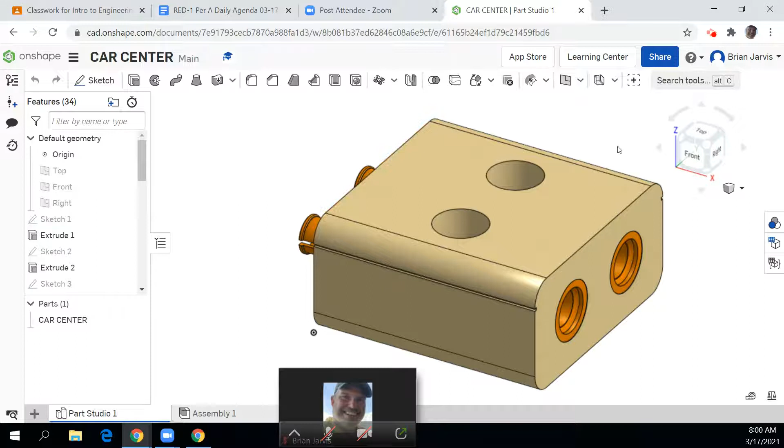Today we're going to show you how to draw the back or the rear of the car using OnShape. As we did for the front end, we're going to select the center part and we're going to modify this to be our back end. So how do we begin? Always start by going to copy, and I'm going to call it the back end.

Okay. Now, the back end has a few features here. I'm looking at it here. And the back end requires 2 pegs, but no sockets. So we're going to have to get rid of the top features and the sockets in the back. So we're going to come over here and just start looking at what we can get rid of, like those. Delete. Sketch number 2, delete.

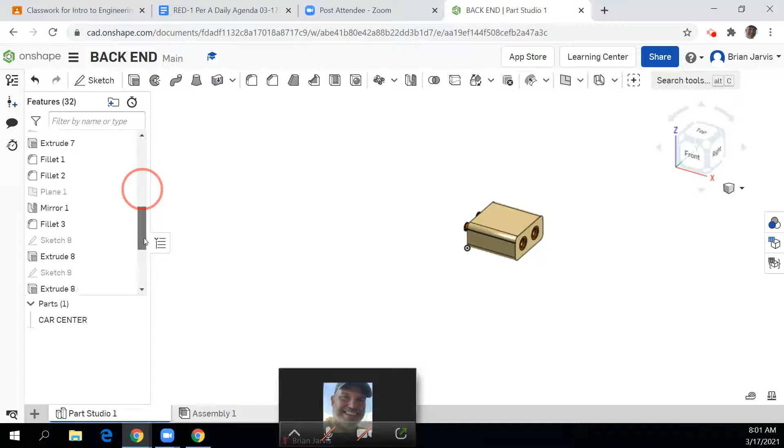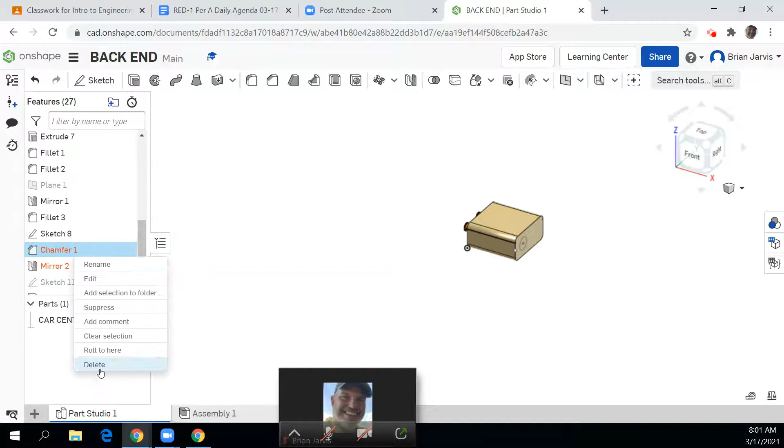Now, I don't want to get rid of anything that we did with the pegs, so I'm going to move back down and look at, there's our sockets. It does highlight them when you pick them out, so it shows you what they look like. Boom, all that's gone. Extrude, gone. Now, could I have gone through and just done all that? I could have selected it all really and done all that.

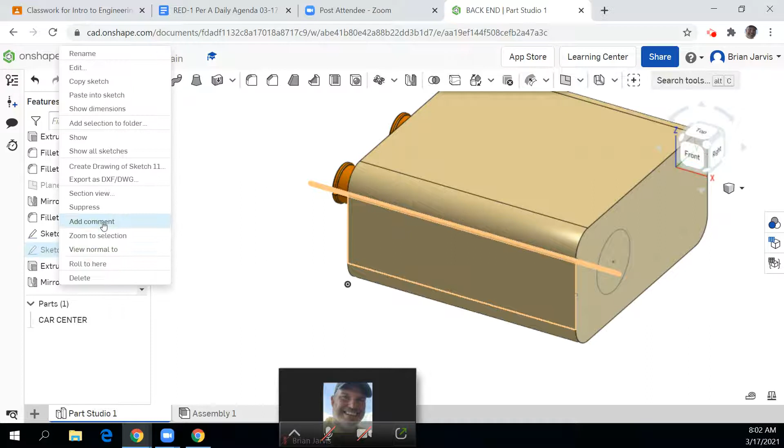Now I have, oh, that's on the side. I'm actually going to leave that. I think I can keep that. What am I talking about? That's this little groove right here. So now, as we did before, we're going to place a sketch on this right side. So I'm just deleting all the other sketches there. I got rid of them all.

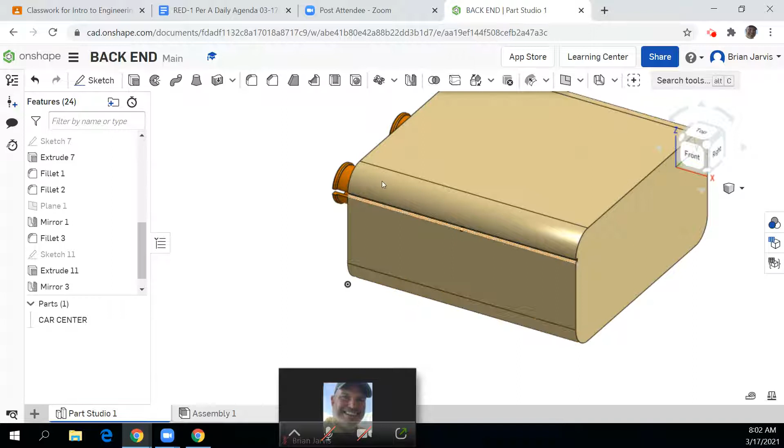Oh, look what it did. It got rid of the, let's go back and see what happened. See where I must have deleted a sketch that I needed. So I'm going to get deleted sketch number 8. There we go. So notice I can just hit undo and it goes back and gets rid of that for you. So now we're ready to go. I'm going to do a sketch on this edge just like we did with our front end.

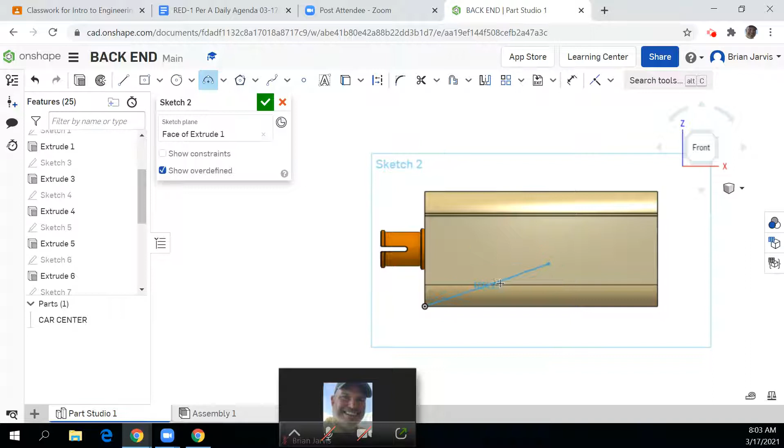And now I'm going to try to figure out how far do I have to come over. It says actually 1. So the back end comes flat across the top. And then there's a curve that comes down. It's probably a big curve. So I'm going to use my 3-point curve here. Starts about there. And probably comes up to about here. And then it has this kind of rounded bottom like that. I can add some dimensions after I get the shape outlined.

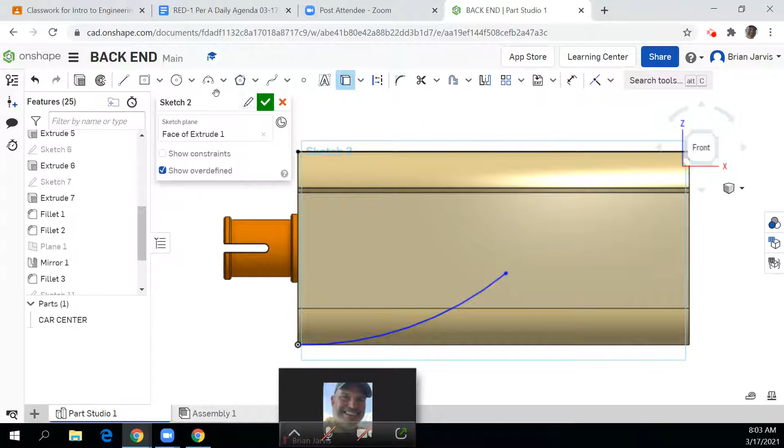And I'll do that. And then up top here, I'm going to do another. Now see how it's not touching? It won't grab that edge. This is where you could use convert or project. I pick that line. Notice it goes black. Because it goes black, I can use it for something. Whereas I couldn't do that before, right? So I'm looking at this and it comes down kind of like that. Maybe that's a little too low.

I do like using these arcs. They're not tremendously precise, but I think it looks pretty good when you do it. Oh, I got out of arc. Oh. Something. I think the back end actually goes up straight as I'm looking at it. Well, maybe not quite straight.

I haven't added a single dimension yet, so now I'm going to have to start looking at my dimension to see if it's going to be, wow, 1.09. I expected it to be 1 inch. So that edge, see, while it's still blue, I can still manipulate it. I have to get out of dimension, so I'm going to hit escape. I'm just going to drag this point down. It's not going to change the 1 inch. I'm just changing the angles and stuff to get it more like what I want it to look like.

And I do have a couple of dimensions that I'm going to go with. That one looks pretty good. I think this dimension really should be from here to this. Going to be right on that edge, so 0.16. A little lower, good. The other thing is I want to know where that transfers up. I think it's about 0.25 up.

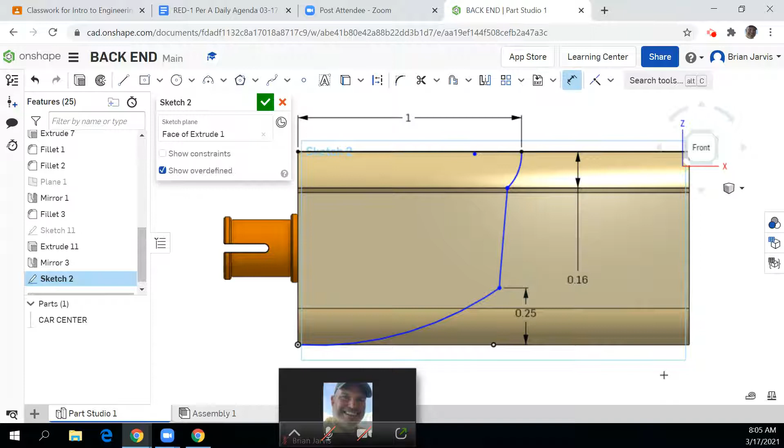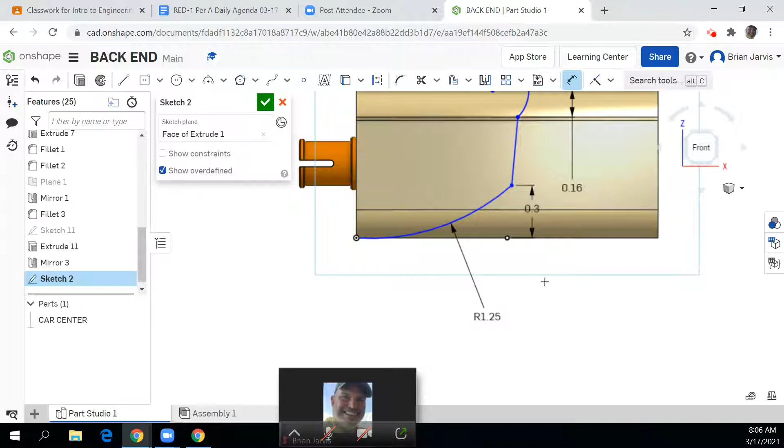Yeah, maybe I'm looking at some of the dimensions I have on here and realizing that's probably a little low. 0.3. Now, the dimension I had written down for this bottom arc was, let's see how close I came. 1.25 is what I had written down. That's actually not horrible. Be careful. See how this arc is not touching there? It may end up being a problem where it cuts out and then comes back into it.

So a lot of times I'll change this arc to be a little less. Oh, I'm sorry, a little more. 1.4. Cut it a little bit steeper. There we go. So let's just say it's not ideal, but we're going to go with it, and we'll play with the dimensioning later on.

Actually, I want to check one other dimension before I change it up. There it is. I want to see how far it is front to back. I have it written down as 0.9. So this is the last dimension I'm going to put on here before I start cutting this out. From there to there. I said it was 0.95. That wasn't horrible. I like the way this tapers in a little bit, although if I'm looking at it, it doesn't really taper in that much, but I'm going to leave that.

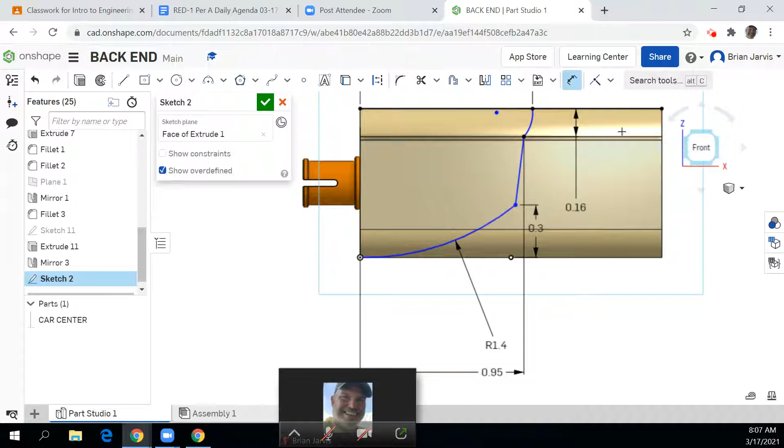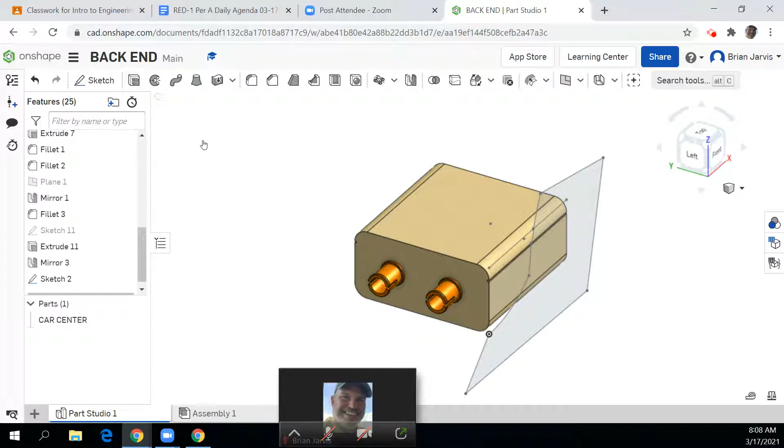So now, just like we did with the front end, we're going to make something that we can cut out of there. Make sure they touch all those points. And now I have a profile that I can use to remove the entire back end. So I'm going to do remove, pick my profile, and you'll notice it's going to cut right across the back and give me the shape of my back end.

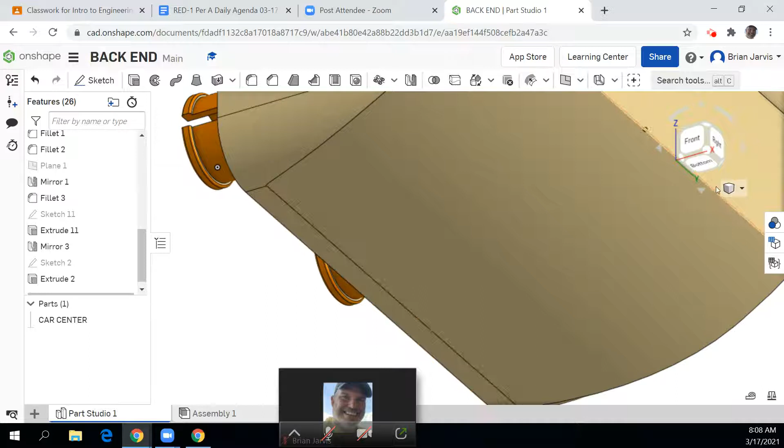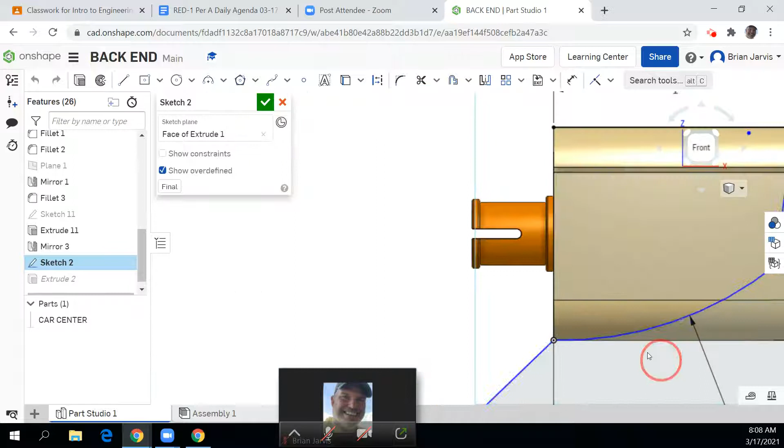There. That's what I was talking about. See how that comes out and then all of a sudden it stops? So that arc that I made, I can see my part and there shouldn't be a little stop right there. So I'm going to go back and manipulate my sketch just a little bit. Edit sketch. So that I don't end up with that little bit of a flat surface there. In order to do that, I'm going to have to increase this number, 1.5. Finish our sketch, and it should hopefully fix the problem. If not, it's going to get smaller.

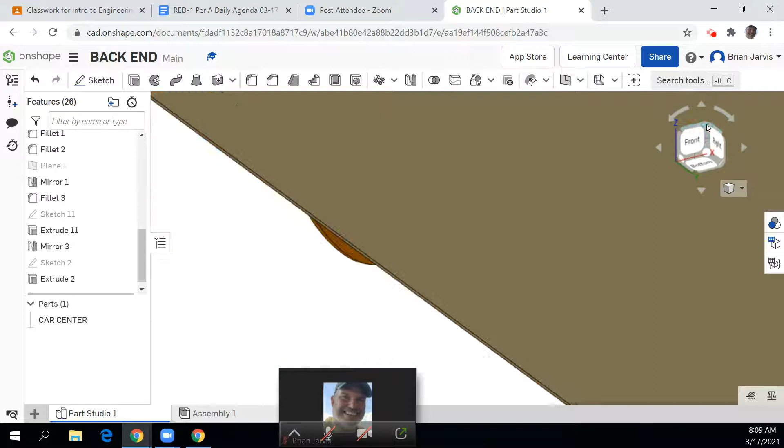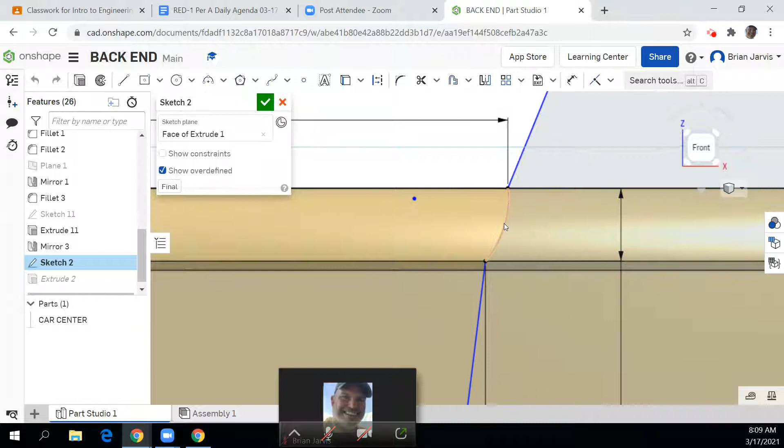Well, darn close, isn't it? Leaves that little tiny move. I guess that's more than fine. So now I'm looking at my sketch and the profile that I created versus the profile that I have here. Oh, I know what I did. I have to go back and do my sketch again. I'm just looking at it going, yeah, that doesn't look right. You know why? Because this arc right here is supposed to go in like this. So I had it go in the wrong direction.

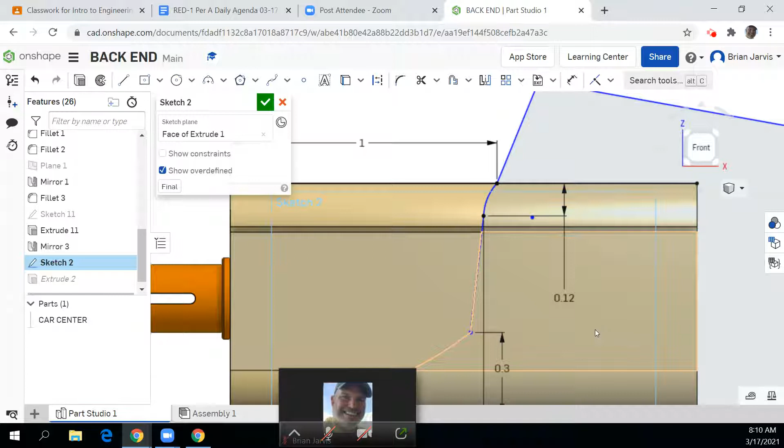And the other thing is, I don't think it's 0.16 down. I think it's actually going to be 0.12. So it's a little bit higher. Finish our sketch. That's better. I was looking at it going, ooh, that doesn't look quite right.

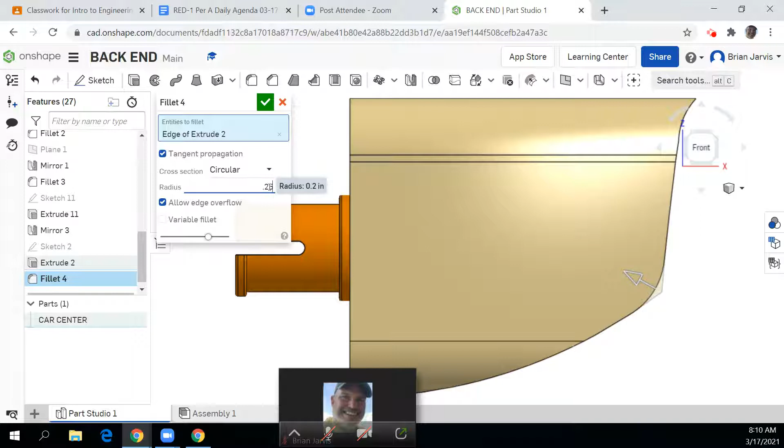The other thing I'm going to do is round this corner off here. It's not quite so sharp, so I'm just going to use a regular fillet to round that off. Boom. Actually, the 0.2 looks perfect. I have it written down as 0.25. I wonder if that looks better. Yeah, that looks good. So now I'm getting the shape that I'm looking for my car.

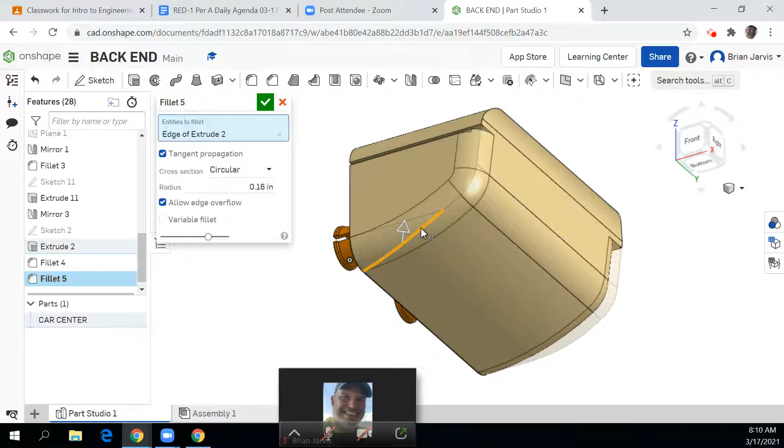And I can add the fillets now too, if you wanted to. Remember we did a 0.16 fillet on all the sides, so hopefully I can select this edge and see how it propagates that whole edge. I'm going to propagate this edge and that edge. And you know what? Look what's interfering here is this. See how this cuts through here? Same thing happened prior to this when we did the front end. So I guess I'm just going to have to go back and get rid of that.

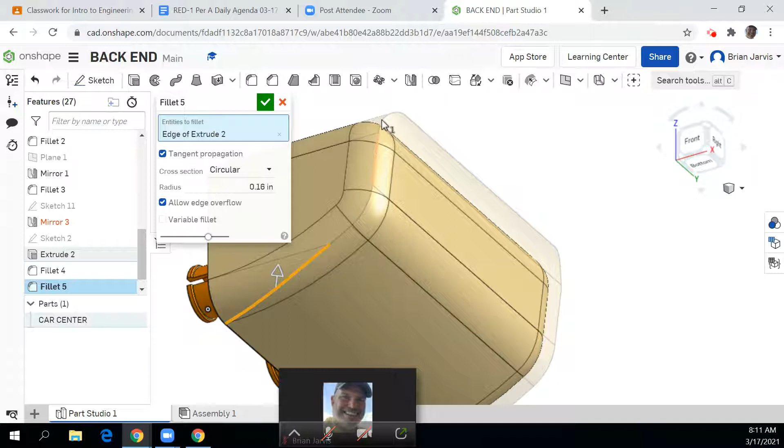Delete. Now technically I could leave my sketch there and just turn off the visibility so I don't see it. And that way later on if I wanted to put that groove back in, I can do that, which is kind of cool. All right, fillet 0.16. I should be able to just grab this edge, and see how it goes all the way up now. Yep. That's what I was looking for.

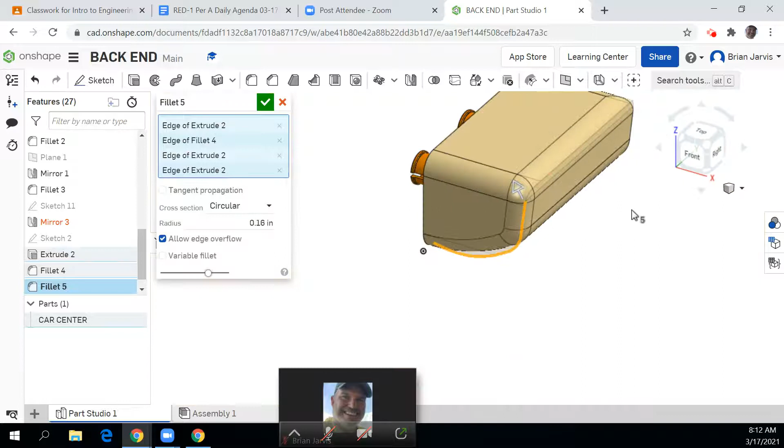Oh, see how that's funny. It propagated this top piece too, so I don't want that. There. So let's see. Take that edge. Make sure you get all the little edges there you want. That edge, but not this edge. Oop, not that. Sometimes I'll go back and select the different edges.

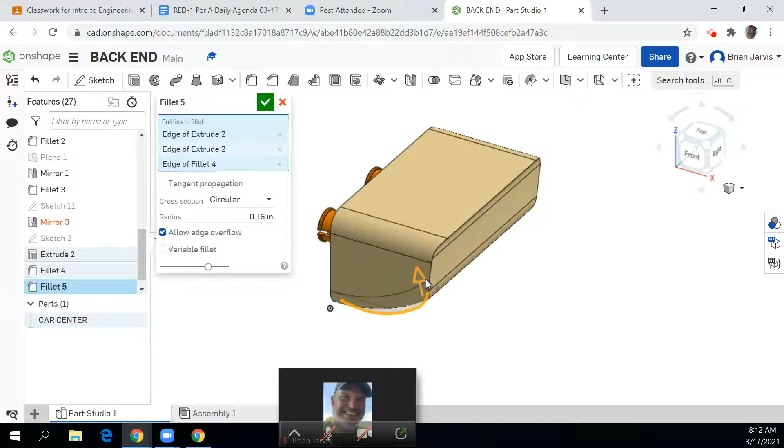Let's see. This edge for sure. I'd like to come up over this edge, but as soon as I click that edge, it rounds it right over. So a lot of times I'm playing with this, trying to get it set up the way I want it.

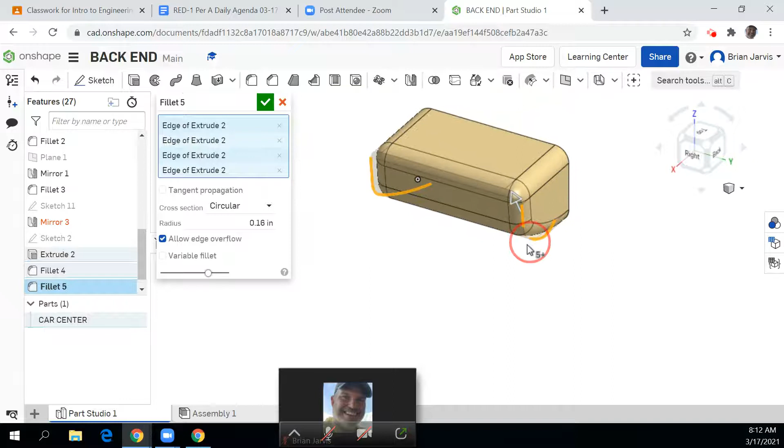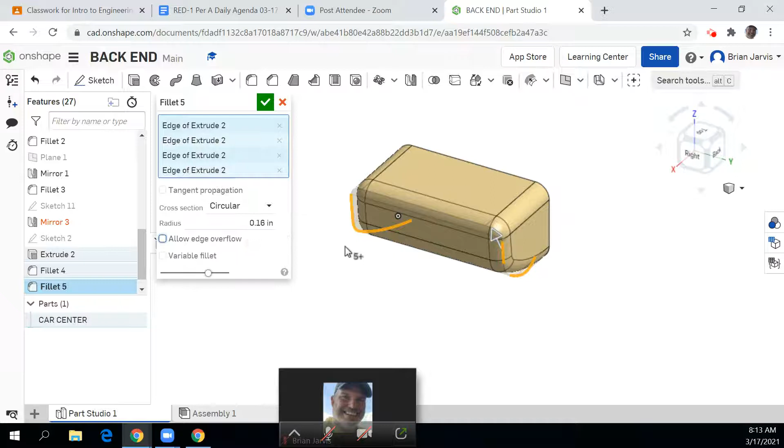So I wonder if that didn't change it. I'm just checking to see if they're all attached. Somehow it's propagated that other one. I want to get rid of that. Boom. Well, it's funny because I wanted to leave that back edge there, and it just wanted to go back and fillet it. See, that's what I'm looking for, that little piece right there. I didn't want to round that edge over.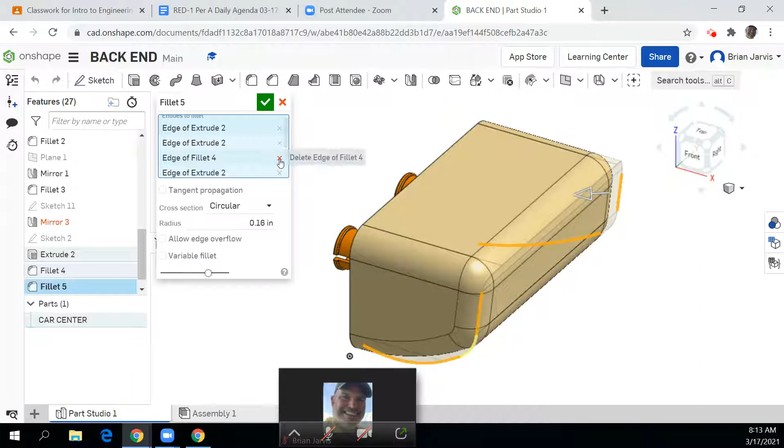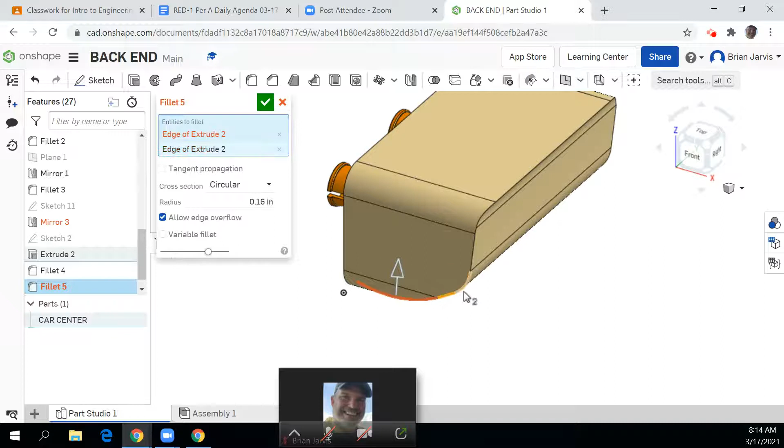So maybe I'll get rid of this little tiny surface right here. See all the edges that I picked? Pick this one. You know what? Sometimes it's easier to just delete it and then add it again. 0.16. I don't want to propagate the tangents because that was going to automatically cut the corners. Boom, boom, boom. That's where I'm going to stop, I think.

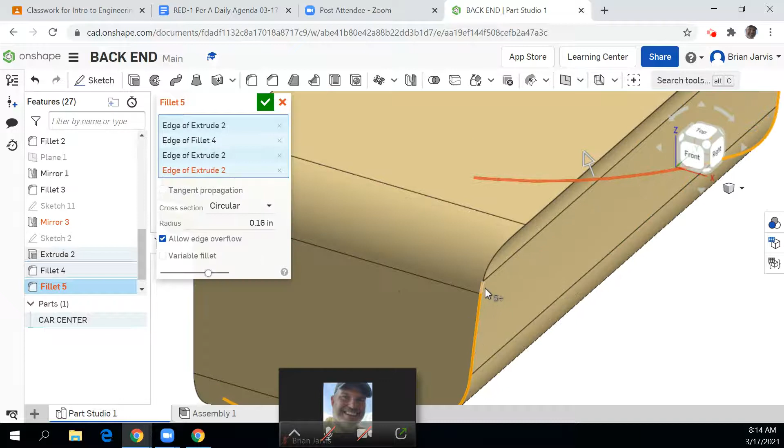I'll pick this and that, and this edge, and that edge. I don't want to pick this edge. Let's see what happens if we do that. Or maybe I do have to pick that edge. Oh, see, as soon as I pick that edge, clear selection. Oh. Well, it's one of those things. You'll get it. It's just a matter of time before it comes in.

Trying to get it just to the right spot. Even if I just did it to there, I'm happy with that, if it allows me to, and it didn't. It's funny. It's just this last one that it didn't like. So even if we just did it there, see how that looks. And then come over and do the same on this side. Fill it.

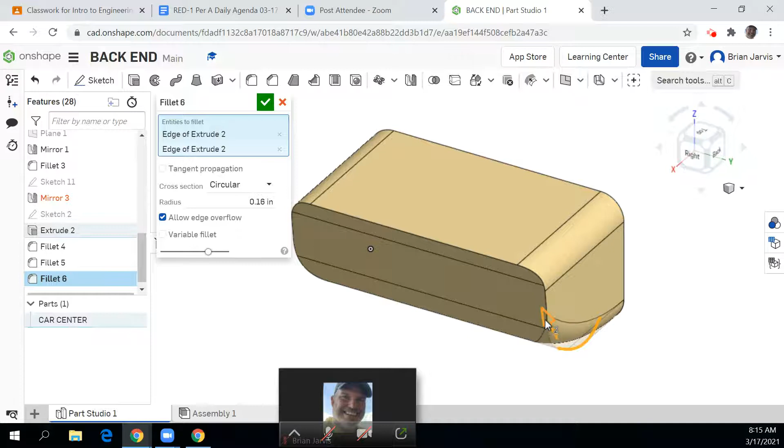0.16. Take this, that. Look at that. Because it says propagate. I don't want to do that. We'll be able to pick each one. Let's see if we pick that line. Doesn't like that.

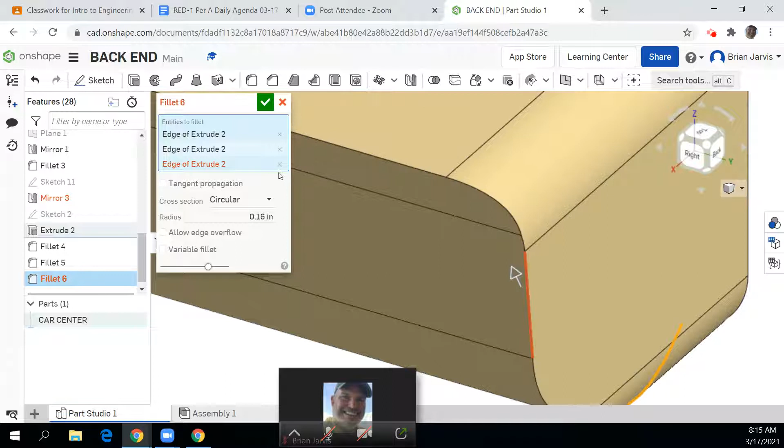Look at it, as soon as I pick that part, it comes right around that corner. And then it doesn't allow me to pick that part. So I'm just going to do what I can for now. You can always add them back later. I'm trying to get the right shape to that. That's not horrible. There.

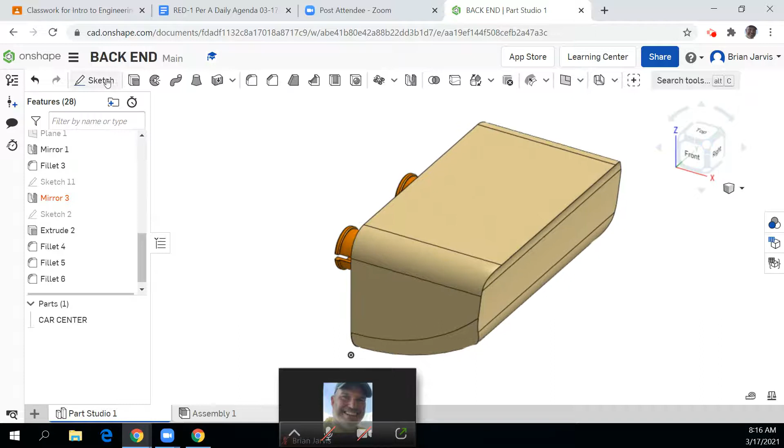So from here, I can do a bunch of different things. I have a couple of tail lights that I have to put in. I have to put the spoiler on the back, and I also have to put an axle on each side. If we went with an axle, I would just put a sketch on here, and the axle is just the same as we did the axles before. I should say the pegs. You start with a sketch. Remember, every single cylinder has 3 different dimensions. It says the outside dimension is 0.27, and then I have to know how far it is over.

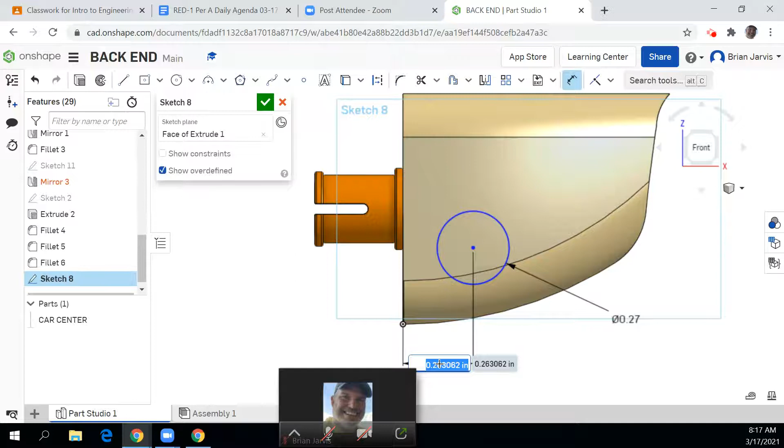According to that dimension, it's funny, I didn't put that dimension in there. I'm not sure why. I got the whole dimension there, I just didn't put the number in the value. So I'm looking at it, boom, 3.5. Whoa! I'm sure you've done that before. 0.35. And then probably the most important one is the bottom up. You want the wheels to be at the same height.

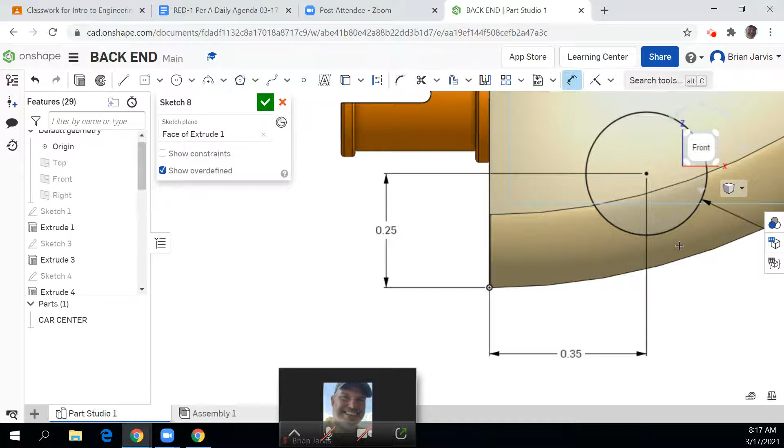So I'm going to pick, and see how it's coming, it's trying to do a parallel line, a tangent line. I believe you can right click, escape, dimension. Let's try that again. Dimension, pick, and pick. There we go. That's what I was looking for. And I have a height of 0.25. It's going to be right on the edge of the fillet, so that makes sense.

I'm going to finish that. I'm going to go to extrude, and much like when we did it before, of course, we're going to add 0.03. Comes out just a little bit. Oop. Isn't that funny?

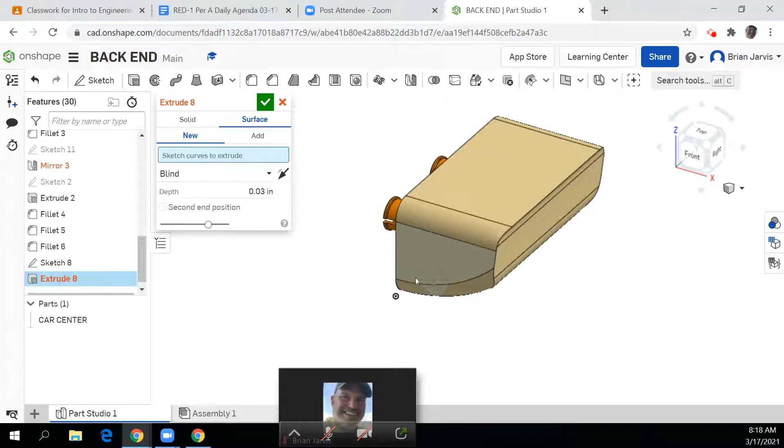Oh, I must have deselected the surface. Let me cancel that. I'll go back and do it again. I was moving too fast, I guess. Boom. Pick that. Pick that. 0.03. That's all we're looking for. Boom.

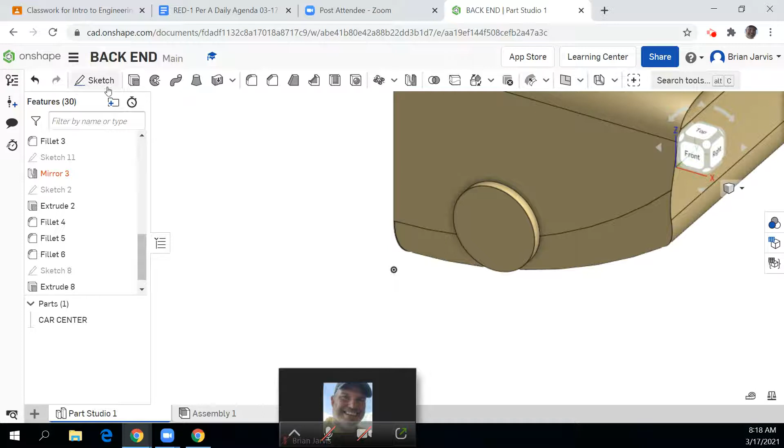Now, just like we did before, put a sketch on this. Put a circle. Make sure you pick the center. Should give you a little square there. And this is going to be the actual axle. This is the little piece up against there. And I have the axle written down as a dimension of 0.15.

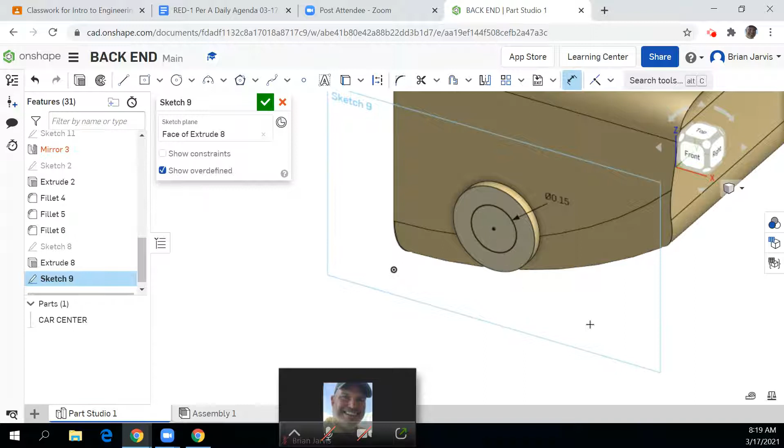So you got to remember, the wheel, right? The center of the wheel's got to be just a little bit bigger than the axle shaft. So you'd have to go back and look, because they're supposed to go together without interference, because this is a clearance fit. It's going to spin right around, right?

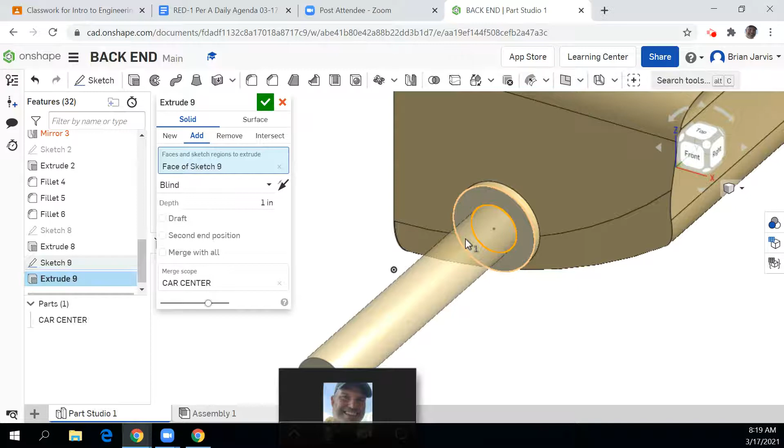So we'll go extrude. I'm going to pick that surface. This one comes out. I think I have it written down here. I thought I had it written down. Oh, there it is, right there. 0.3. That seems a little excessive. Didn't change it. 0.3.

Now we'll do another sketch on the end. Another circle. Same consistent centers, right? Dimension. And I have the outside one is 0.16. That can't be right. Oh yeah, maybe it is. 0.16. We said that was 0.15. I'm going to guess this is probably closer to 0.17. This will look better.

Note on my sketch, maybe even 0.18. Let's just take a look at that. Edit sketch. 0.18.

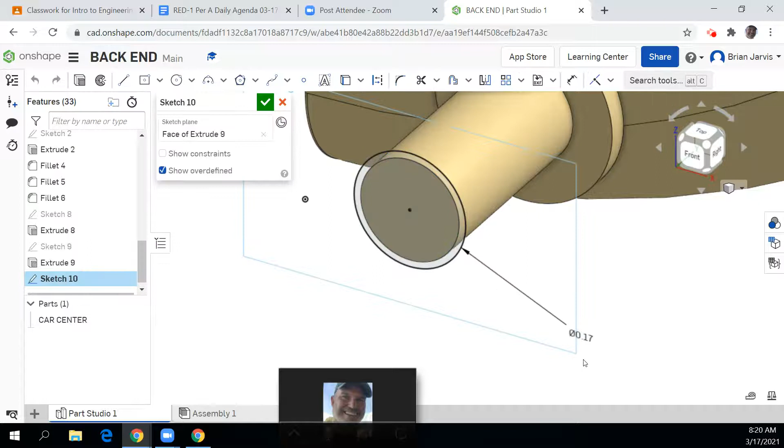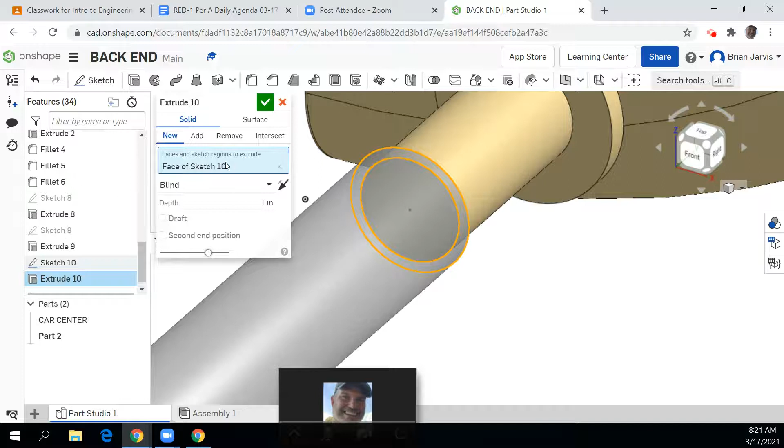Extrude. This time I'm going to extrude it back. Oh no, I'm going to extrude. Yeah, no, I'm going to extrude it back. This is actually pretty important. I did that 0.3, so that's going to be 0.3 is all the way out. So I am going to extrude it back. Add back point. Just a little piece off the back. There we go.

Once again, we're doing another sketch off the end and another circle from the center. This is actually going to be the cutout for the middle. And the inside dimension is pretty darn small. I measured it a few times and I actually wrote it down. I'm not sure I wrote it down on this sketch, but I'm just going to double check. That's what I assumed. It is darn small, 0.06. 0.06.

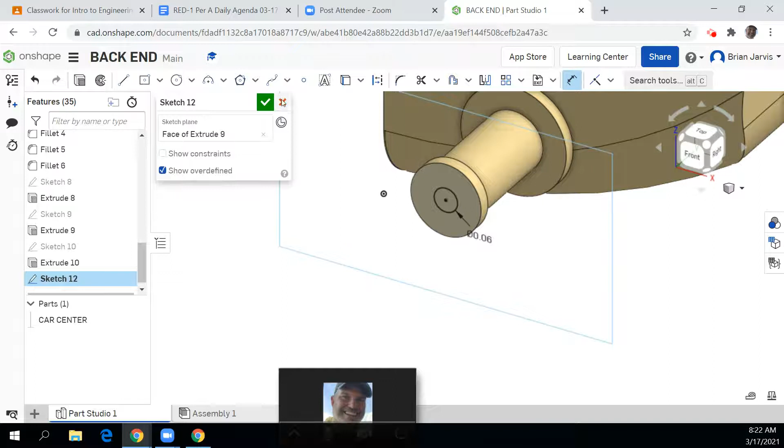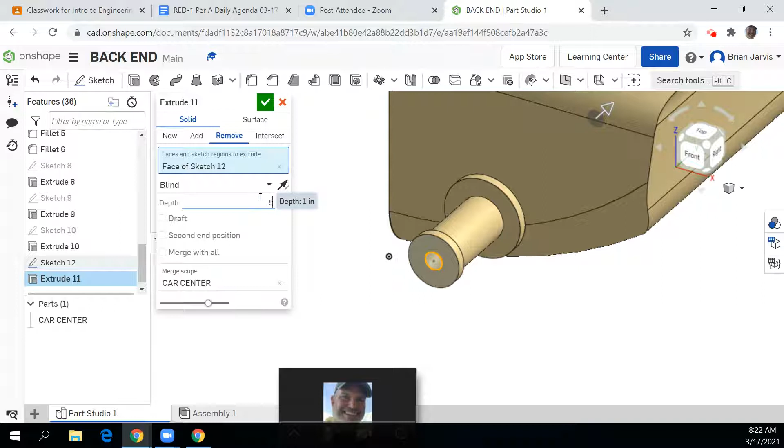Looks to me like that could be a little bit larger, but no, that actually looks pretty good. Just at a glance, sometimes it looks like it could be larger. This time we're going to cut it in, going remove, and we're going to remove at a distance of 0.5, just like we did the other ones. There's our peg starting to shape up right there.

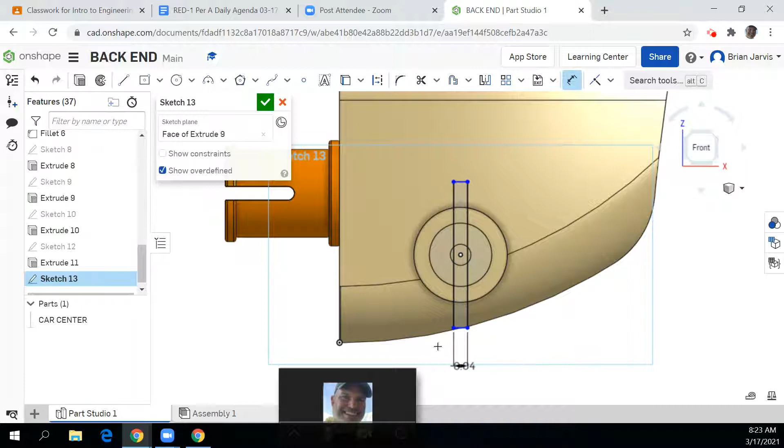So now I'm going to do another sketch off the end, because just like on the pegs on the front, there is a groove there. So instead of doing a circle this time, I'm going to do a center point rectangle. Boom. Just like that. It's actually the same size. If I pick that line, I can come right down and say 0.04. Sketch. Extrude. Remove. I don't need to pick the top and the bottom of that, but I could if I wanted to. Thank you.

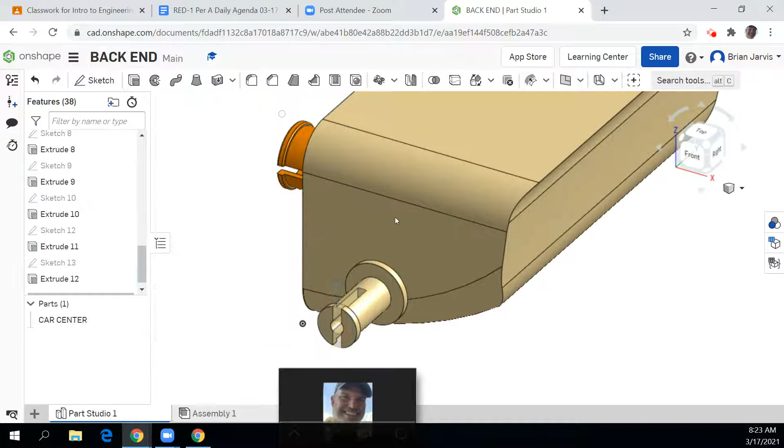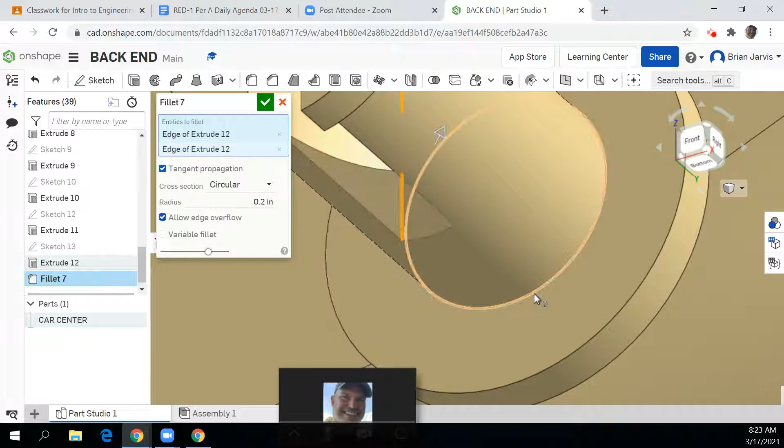Now, like I had done before, it's all about the tweak, making it look good. So I did some rounding of the corners here. So fillet, 0.02. That's rounded. And this edge is rounded. 0.02. That helps. That edge is rounded. And the other edge is rounded. There we go.

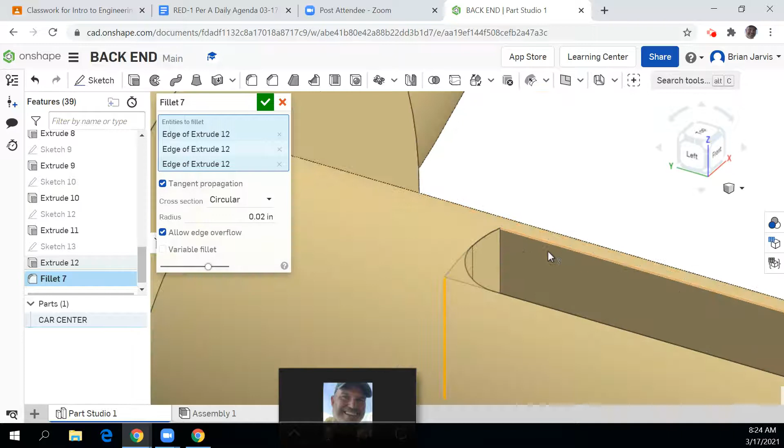And for looks, it's all about the looks, I guess. Let's see, it was 0.04. I have to go back and look. But we definitely rounded some of these edges here. 0.02. Let's do it. Just trying to remember what we used. I think it was 0.08 maybe. 0.08 of an inch. Yeah, just enough to give it a little edge. Make it look not so sharp. And there is our axle.

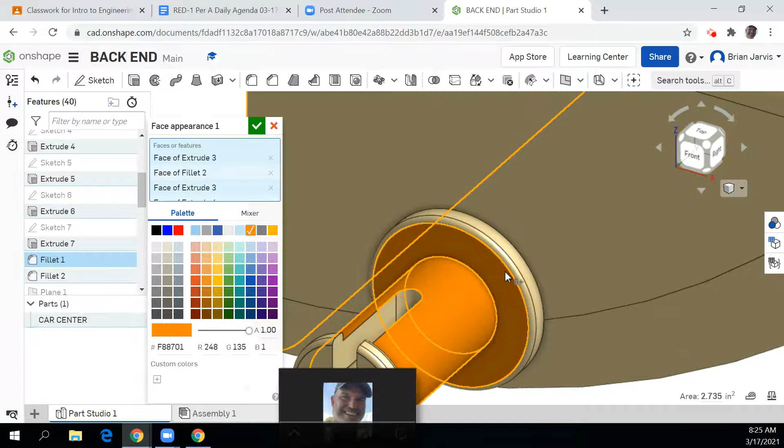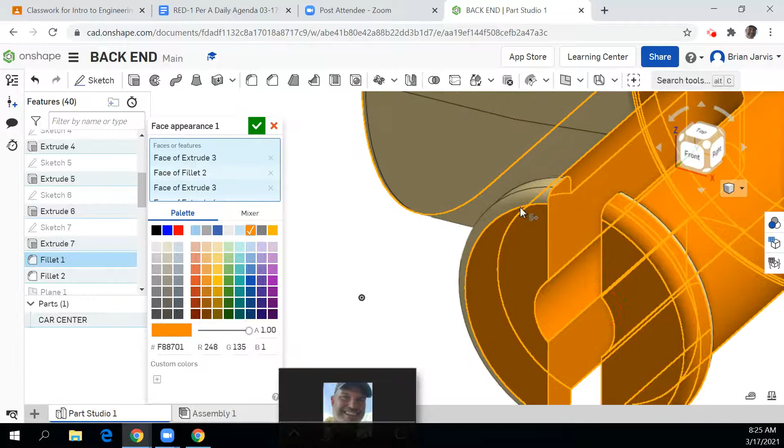So as we've done before, I like to do this. I just pick that. I go right click, edit face, and I can pick anything. See? I can pick all these pieces right here. And the nice thing is, I don't have to go back and select a color because it's going to do whatever color I had before picked. So I'm just going to pick all those surfaces. Oh, I missed it. I missed it. I usually get them all that I can right there, and then maybe I'll flip it around and look at it a little closer.

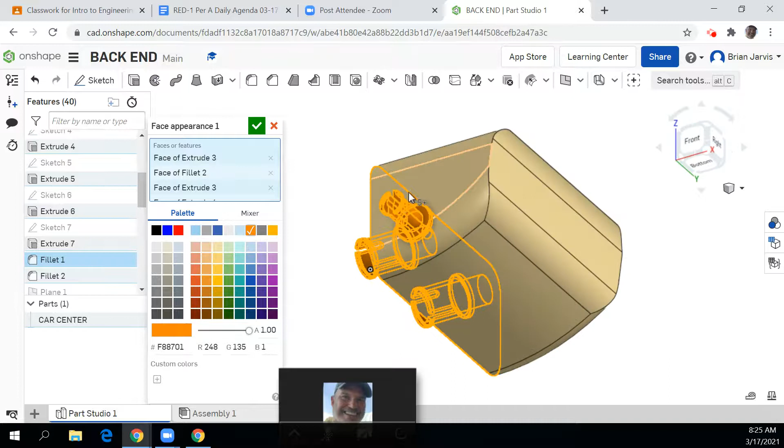Then I look at it from the, you got these surfaces that we didn't catch before. Good. Check. And then, I love this. We're going to put a plane on there. Actually, I think we have a plane there. Let's go back and look, because we had a plane way back when. There it is. See that? I'll just turn it on. Show plane. I can use it.

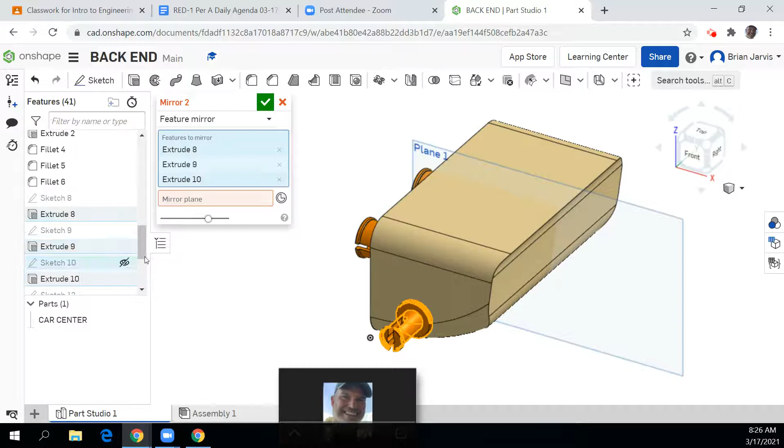So I go to mirror. And now I have to figure out what I need to mirror. So that. Oh. Oh, remember this? I hate that. Feature mirror. Now I gotta go back here. See where I started with our first. So that one, that one, that one, that one, that one, and that one. Our mirror plane. Boom. Check.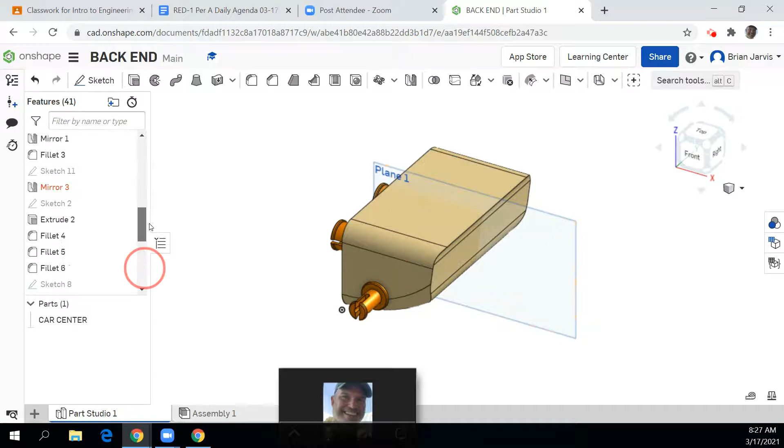We should have it on the other side. Oh, I didn't change the color, but I'll have to change the color. So now I'm going to turn around and I'm going to hide the plane because I don't need it anymore. So it's looking pretty good. I still got to do some tweaking. I know I have to put a couple of holes here in order to get that plane, so I can cut those holes out.

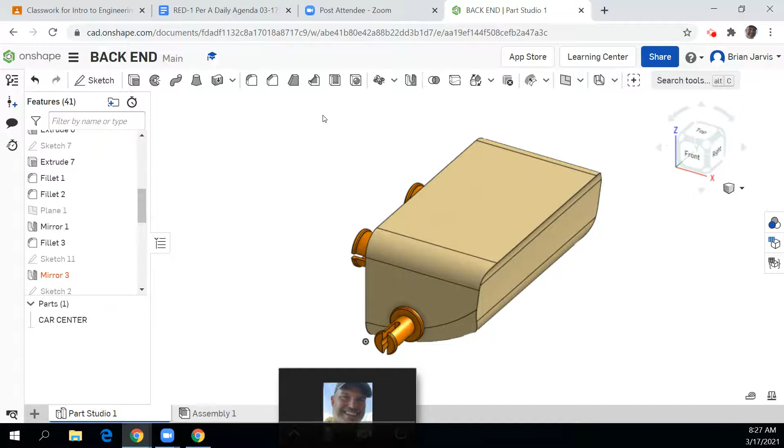I'd go to plane, and I'm just going to use a regular old offset to pick that. Notice it's going the wrong direction there. Go back the other way. 1 inch is good because that's what I said it was. Put a sketch on that plane, and I'm going to start cutting out my holes that are going to be my taillights. One here. This one has 4 of them on there. So I go 1, 2.

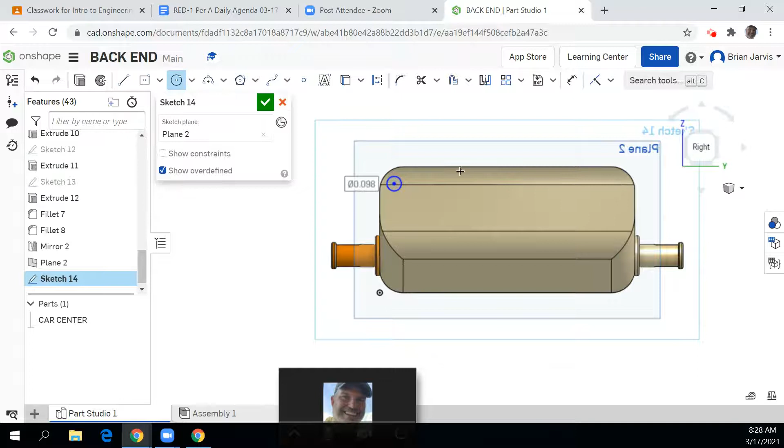Now I could use a mirror on this one too. Maybe I'll do that. So I got to do 2 headlights or 2 taillights here. There we go. From the top edge to the center. I have written down 0.12. That's pretty darn close, isn't it? Now to make them the same, I could dimension it, or I could just say horizontal, pick this one, and pick that one. And then they're going to be the same height.

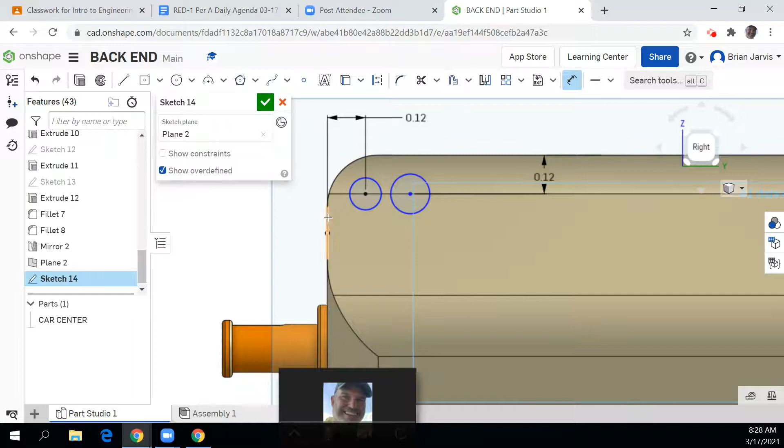From the outside edge over, so I'm going back to dimension. That distance is going to be 0.12. And the second distance for the second one is going to be 0.32. And then the diameter, 0.15. Now I could dimension the second one too, or I can use my equal constraint, just say equal, and they're making both the same size. I can finish my sketch.

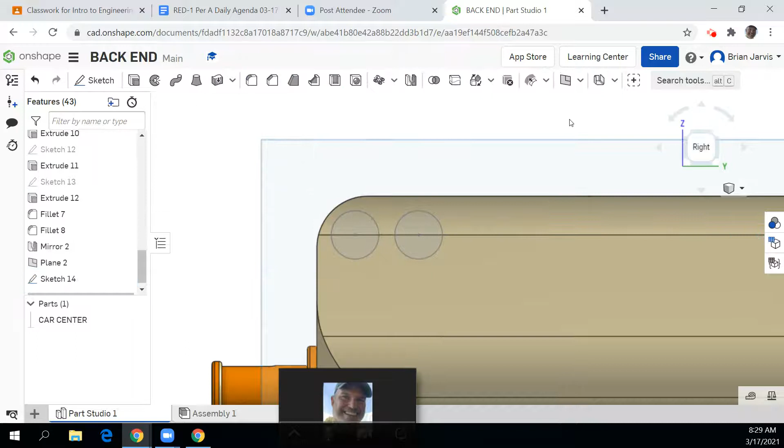I'm going to go to extrude, remove, come in here and just hit these 2. They're going the wrong way. Click. And according to my depth, I have depth of 0.15. We'll see how well that looks. A lot of times I'll look at it before I actually go in and see. I hate that. I guess that's what you're dealing with too, trying to figure out what looks the best. That doesn't look bad. Let's go check.

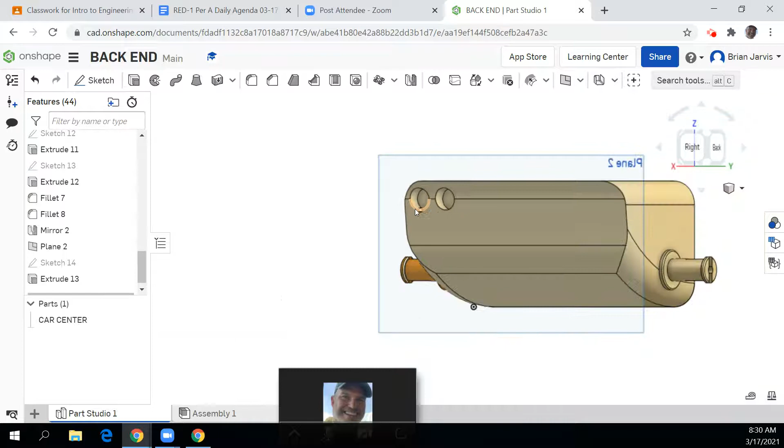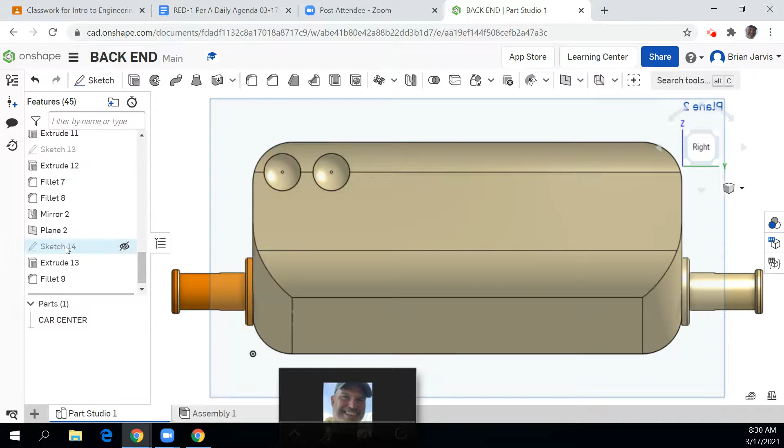And then this is how I get the rounded part of it. I come in and just pick that bottom edge with a fillet. We're going to go 0.07 and do the same thing here. 0.07 gives us that rounded look. You know what? Those seem pretty darn big to me. Go back, edit my sketch. I'll change that to 2. That looks better.

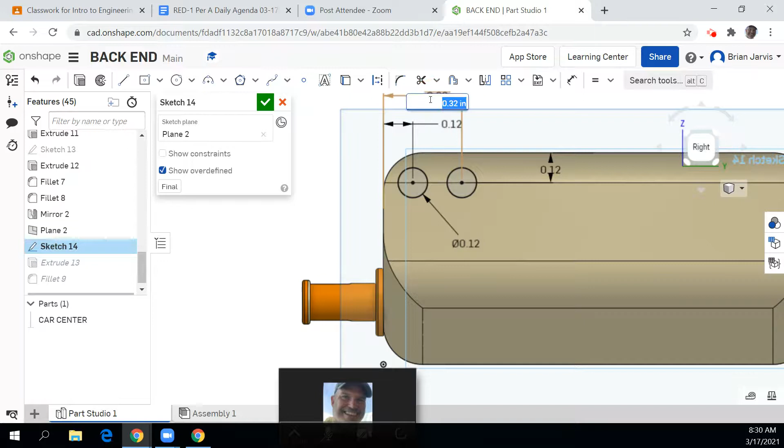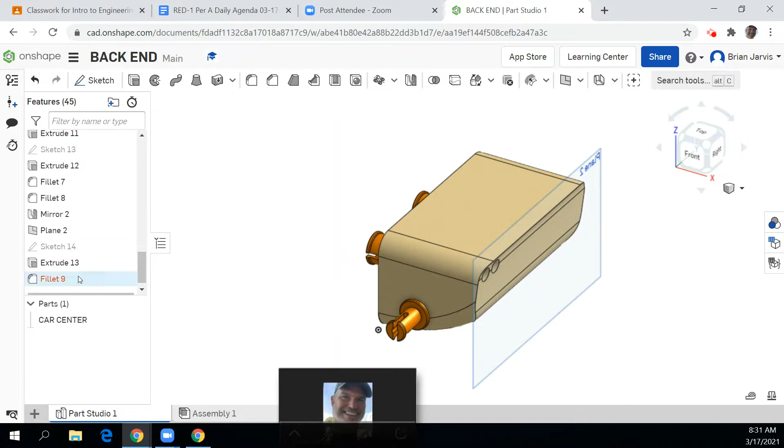The other thing, it looks like they're closer together. 0.28. There we go. I'm going to have to make sure I go back and add those dimensions. 0.28. And this one I put down as 0.12. Changing those dimensions. Let's see if my fillet, my fillet didn't work. Why? If I go to edit fillet, 0.07, I just change it to 0.12, so I have to go half of that. 0.06 would probably work, or 0.05, one or the other. And that seems to give me the green light, and that's looking so much better.

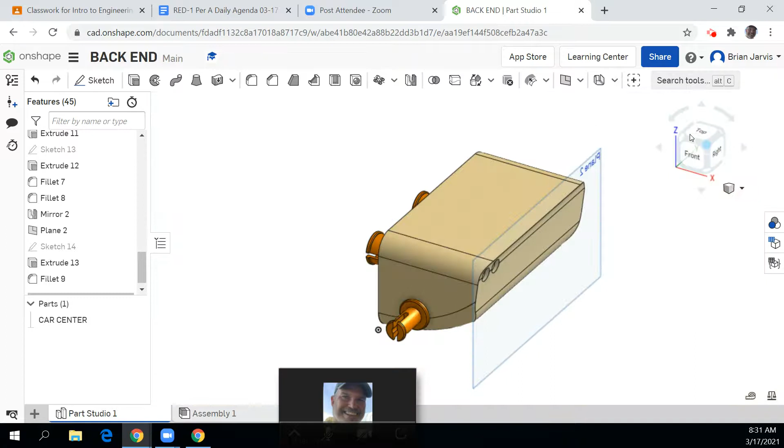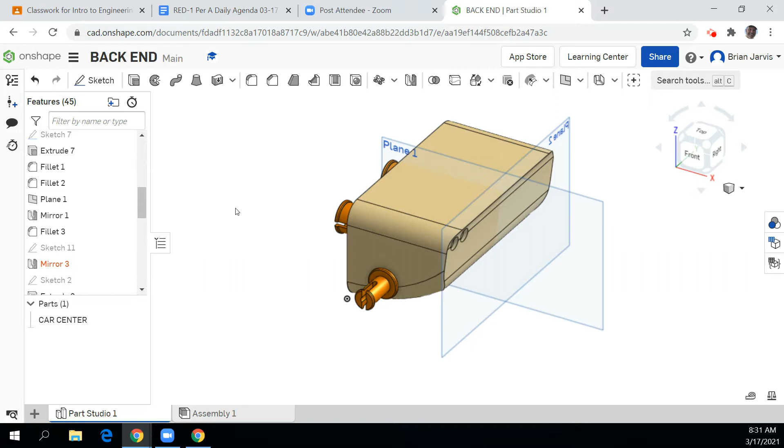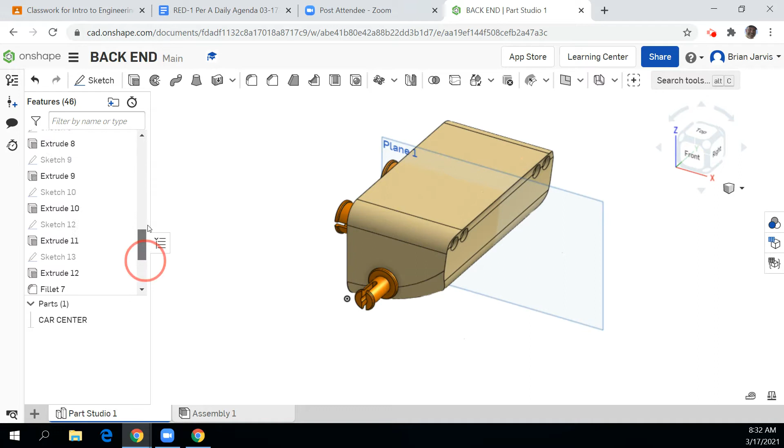Now, I'm just going to mirror that over, so I'm going to go back and turn my plane on. Let's see. Plane. There it is. Boom. So now I go to mirror. I have to pick that extrusion. Oop, remember this. That drives me nuts. Pick that and that. Pick the mirror plane. And say OK. So now I'm going to turn off a bunch of planes. That one. And the one I had on before.

And we got basically the same shape. I got to tweak it a little bit. And I still have to put the spoiler on. But I'm going to let you guys figure that one out yourselves. But that's basically how you're going to set up and do your back end for your car. This one's for the orange car, but the other cars were done pretty much the same.